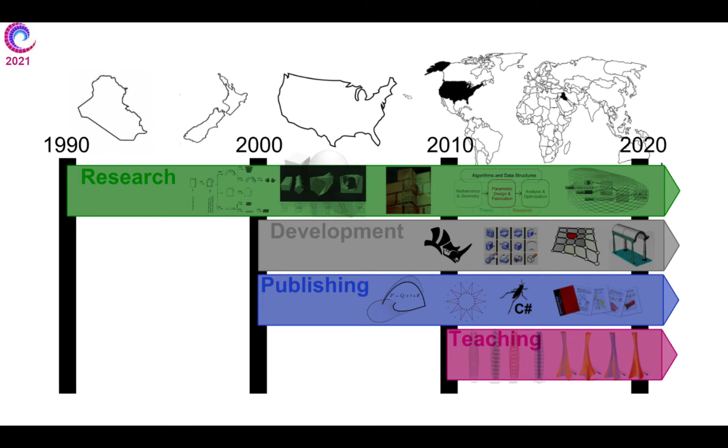The realization that no good tools were available to help creative design started me on a road to learn how to write software, and later conceived a digital tool to create paneling solutions from concept to fabrication.

For any creative design tool to be successful, they need to satisfy 4 requirements. They need to be useful. That is, they fill a gap or solve a problem. They need to be intuitive, easy to use, and fast to create with. They also need to be reflective. That is, easy to edit creations and instantly see the result. Finally, they need to be affordable. They have to be easy to find and access.

There is an abundance of patterns in nature and strong mental images in designers' minds about how they look and how they ought to look in their designs. But the problem is that they are time-consuming to express using any design medium. They are very time-consuming to edit and recreate, and it's really hard to build complex paneling solutions using traditional technologies.

Many things changed in the past couple decades. Fabrication technologies shattered the barrier of paneling complexity and its affordability in building design. Yet, there was no medium available that supported designing complex paneling solutions that also communicated well with fabrication.

PanelingTools for Rhino and Grasshopper simply filled that gap with an intuitive digital tool that is easy to use, edit, and access. It became an essential part of the designer's digital toolkit, whether to create a concept, communicate it, or build it.

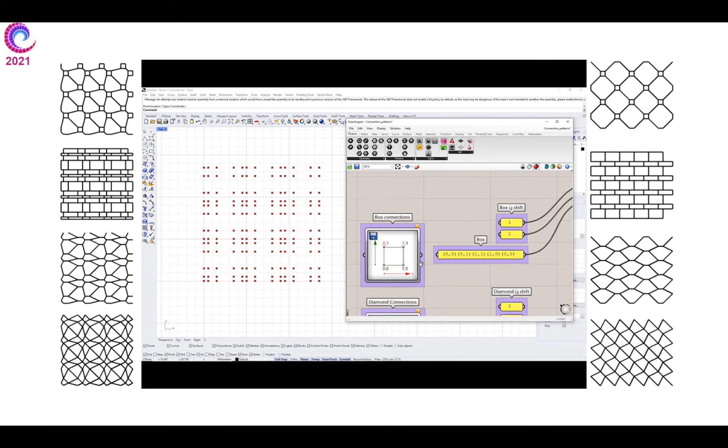PanelingTools uses a two-step solution: grid first, then panel. This gives maximum flexibility to develop paneling ideas intuitively. The grid helps set the flow and the scale quickly using various methods. Paneling patterns can be conceived out of connecting grid points, but also can be predefined modules. The output of panels can be in any geometry format. Designers can pick the one that is useful for the particular stage of design.

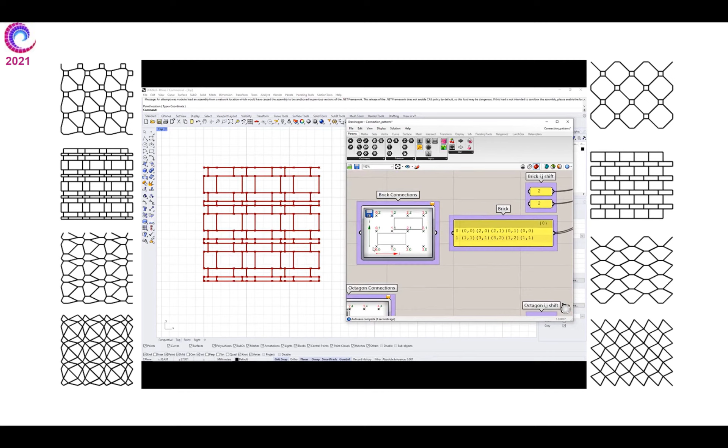At early stages of design, users can quickly synthesize their concepts with lightweight geometry. Once the concept matures, the tool allows creating more detailed panels at the expense of heavier models and slower feedback. Detailed panels can be made ready for fabrication through unrolling for laser cutting or turned into meshes for 3D printing.

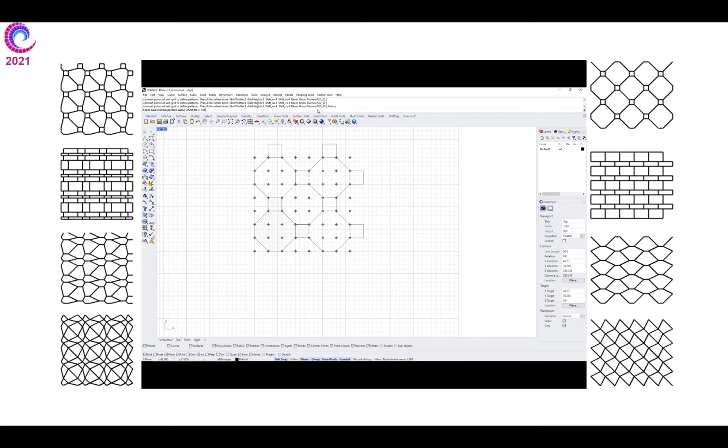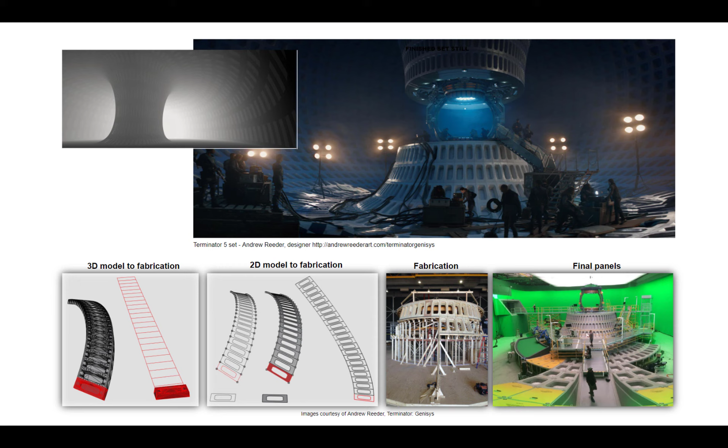To give you an idea how paneling is actually built in practice, I'd like to share with you the paneling process in the movie Terminator Genisys. The set designer Andrew Reeder used PanelingTools to develop and then build his paneling concept. He started with an atmosphere, a feel of space, but also took it all the way to fabrication.

When building the actual set, the 3D models were passed to the contractor. It was in a mesh format. The contractor attempted to orient all panels to a flat surface, then projected the outlines to create the document for laser cutting. He quickly realized that this would be a very time-consuming process and asked for an alternative format.

Since all panels were originally developed from 2D paneling grids, it was trivial to also provide the 2D panels ready to unroll for fabrication. The final set was a combination of physical and digital parts augmented to create continuous space.

What started as an idea and experiment became a popular tool used everywhere, not just in architecture, but also in other design professions and during all stages of design and building.